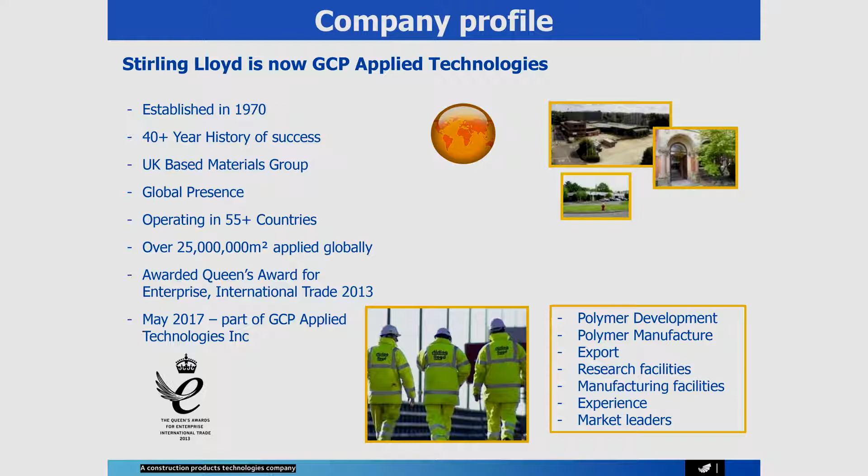The company Stirling Lloyd has more than 40 years experience in producing and developing waterproofing materials based on polymers, mainly methyl methacrylate. We have a global presence at the moment worldwide in more than 55 countries, where we achieved in the past 47 years application of more than 25 million square meters. From May 2017, we became part of GCP. We specialize in development of polymers, manufacturing, and making them available for everybody worldwide.

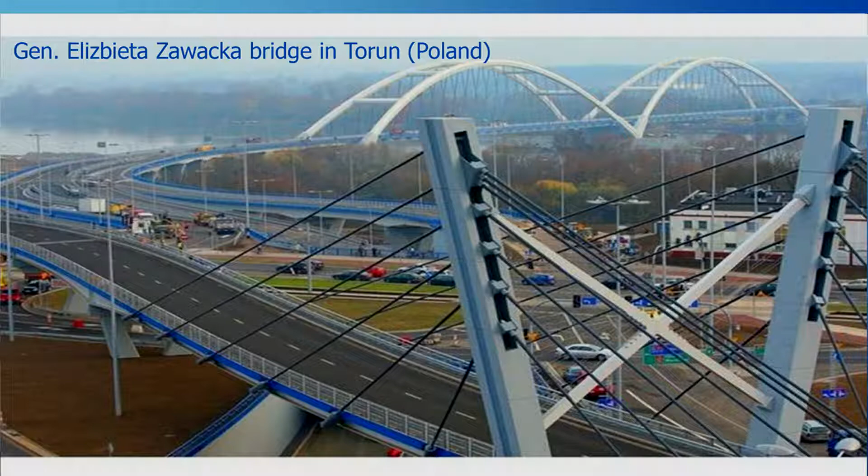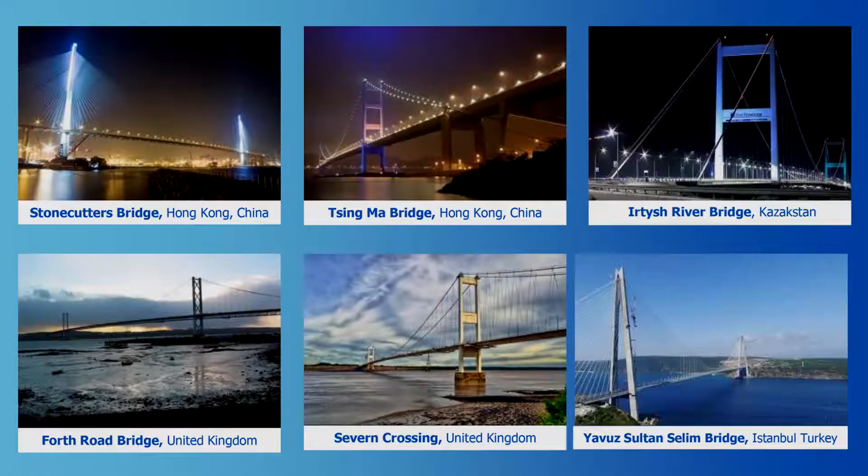A few successes of our application are Prague's Charles Bridge, Forth Road Bridge in the UK, the Hong Kong West Harbour Tunnel, which has been sunk to a depth in the sea of only 30 meters, the railway link in Boston, United States, Neponset River Bridge, Dubai, Durrat Al Bahrain, the viaduct, and Lincoln Tunnel in New York, as well as George Washington Bridge in New York City, Humen Bridge in China, where it was one of the first worldwide applications of our material together with Mastic Asphalt, also known as guss asphalt.

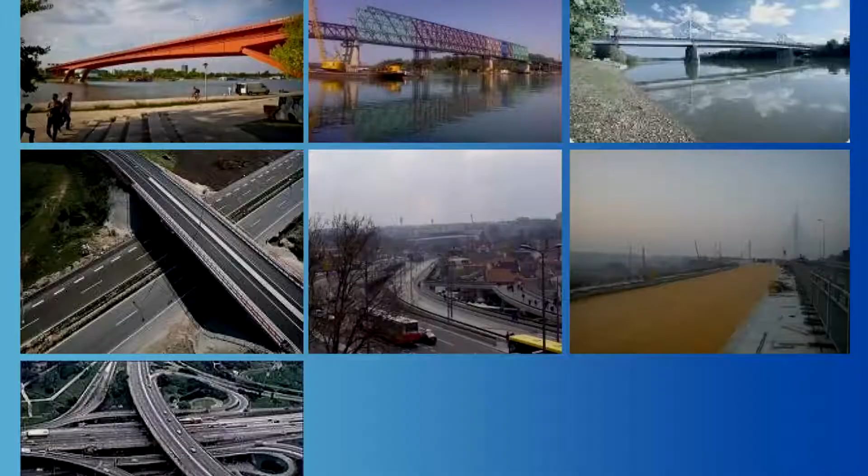This is the application of the immersed tube at the Formula One race track in Dubai, sorry, in Emirates. This is the Stonecutters Bridge in Hong Kong.

Pupin Bridge in Belgrade, Serbia, to show that we're not working only in the Far East, Middle East, or North America, but also have presence in Balkan territories.

Railway link in Russia, Sochi, 45 kilometers of steel and concrete bridges linking Krasnaya Polyana with Adler. Hong Kong railway link with the airport. Øresund Bridge, the railway link between Denmark and Sweden. Golden Horn Bay in Vladivostok, steel bridge deck covered with Mastic Asphalt for the APEC summit in 2012.

Poland, a very important European Union investment of more than 600 million euros to build a new bridge viaduct linking Torun with the highway Truss A1, and as well, closer to today's topic, the success of using our waterproofing material with Mastic Asphalt on iconic bridges: Stonecutters Bridge, Tsing Ma, Irtysh River Bridge, Forth Road Bridge, Severn, and Bosphorus 3.

It's not all the pictures, sorry. As well, a few references from Serbia and Montenegro, where we've done Gazela Bridge, Cerova Ćuprija, Obrenovac, a few bridges on the border between Bosnia and Herzegovina with Serbia. The most recent is Bratislava Bridge.

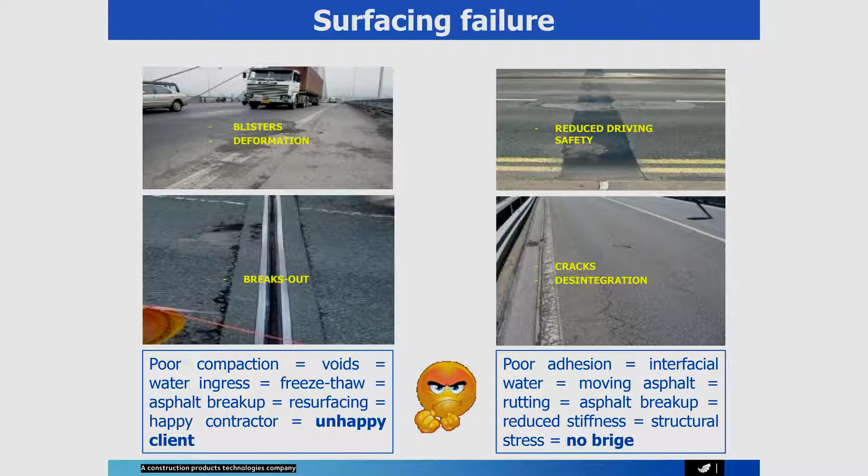And now, what exactly am I talking about? First of all, what is the problem now on structures like bridges and viaducts is mainly problems related to failure of surfacing. Those problems are related to poor compaction, voids, water ingress, poor adhesion, interfacial water between the layer of surfacing and waterproofing, and all that creates a lot of problems for the bridge constructor and the users of those bridges.

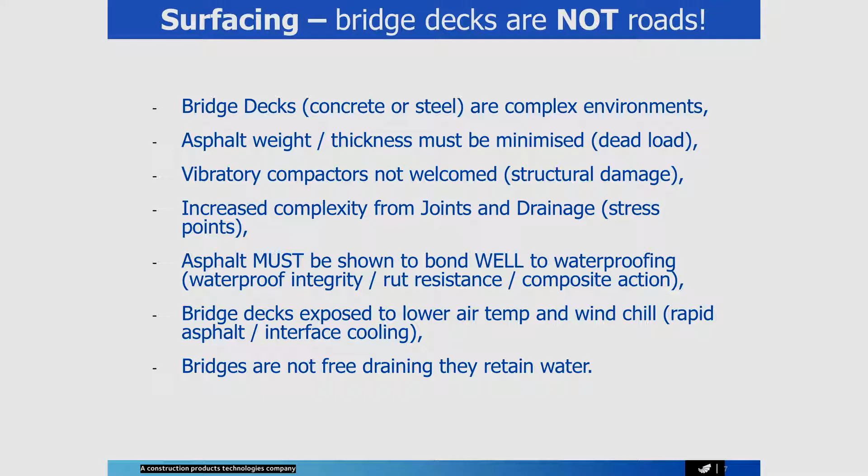We have to remember all the time that bridge decks are not roads, and the approach to maintenance and, first of all, construction and design of bridges should be absolutely different compared to roads. Because bridges are not free-draining structures, they retain water between the layers, and therefore we suggested to look more into the details of compaction, using the materials together and working together in the same way.

So we decided that bridges are structures for high stress usage, and therefore the surfacing should be specified for high stress sites, not just as for the roads.

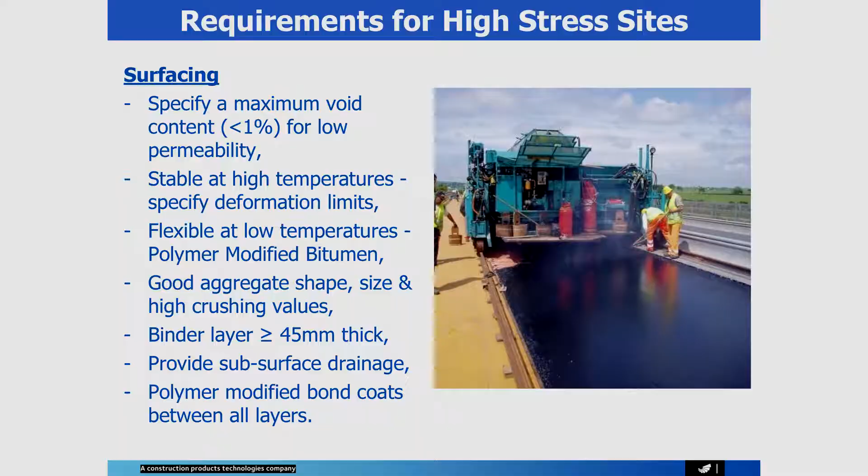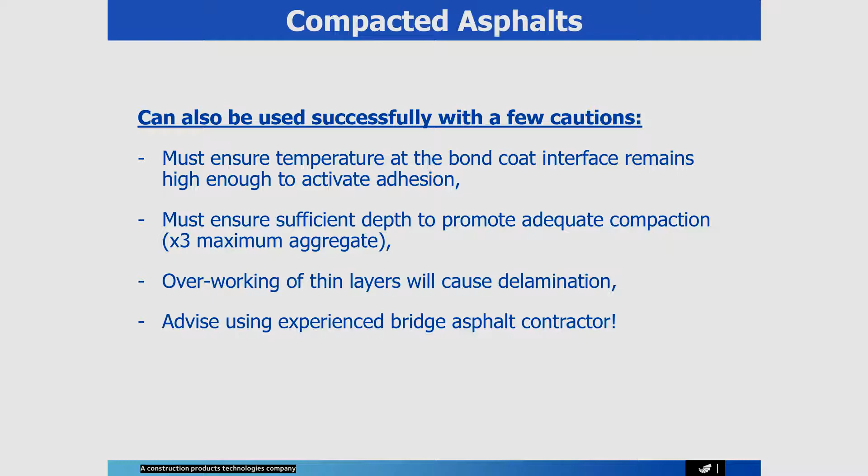So we started to look at what type of asphalt surfacing is used on bridges: compacted asphalts or non-compacted asphalts. Compacted asphalts could be used on bridges, but should be approached with massive caution, because the temperature of the bond coat interface should be high enough to activate the adhesion between waterproofing and surfacing, and there is a need to control the work of the asphalt applicators on the bridge.

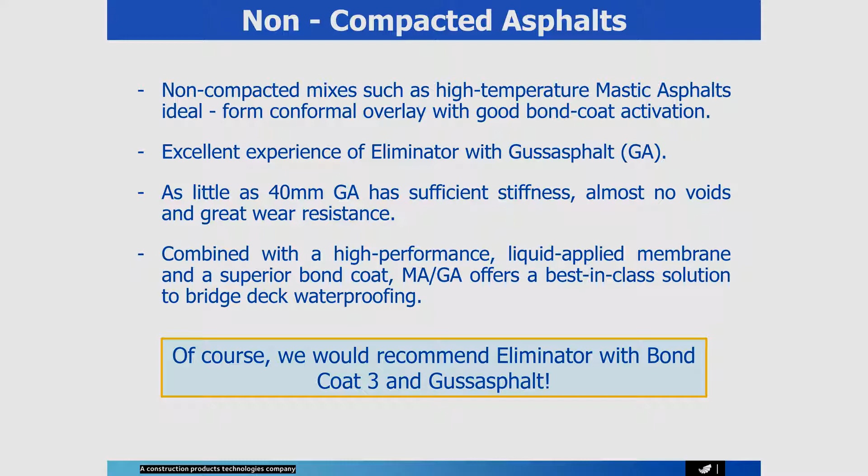At the same time, we started to look into the behavior and usage of non-compacted asphalt, or, easier to understand, mastic asphalt. In the past 40 years, we developed more than 12 million square meters worldwide using asphalt with our waterproofing system. And of course, we now recommend for everybody in the world to use our waterproofing with asphalt to avoid a lot of problems.

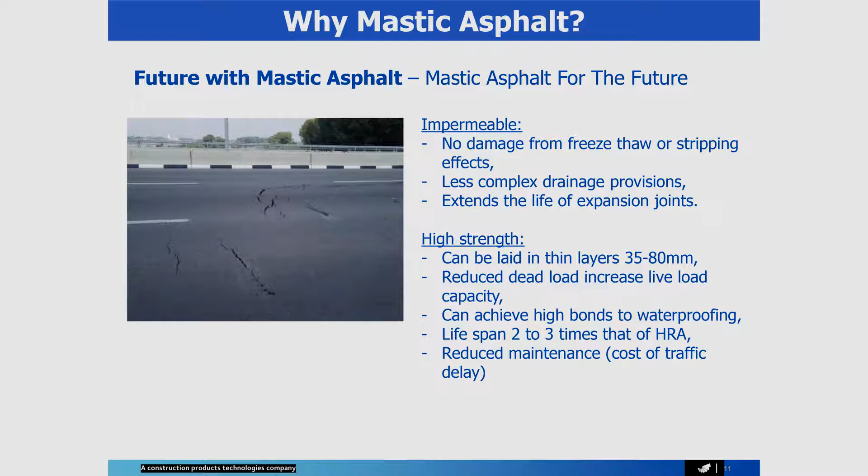Why mastic asphalt? First of all, if you're using compacted asphalt, then you can have problems with the liaison at the interface of the surfacing, and non-mastic asphalts do not represent impermeability. Mastic asphalts are impermeable and they have high strength.

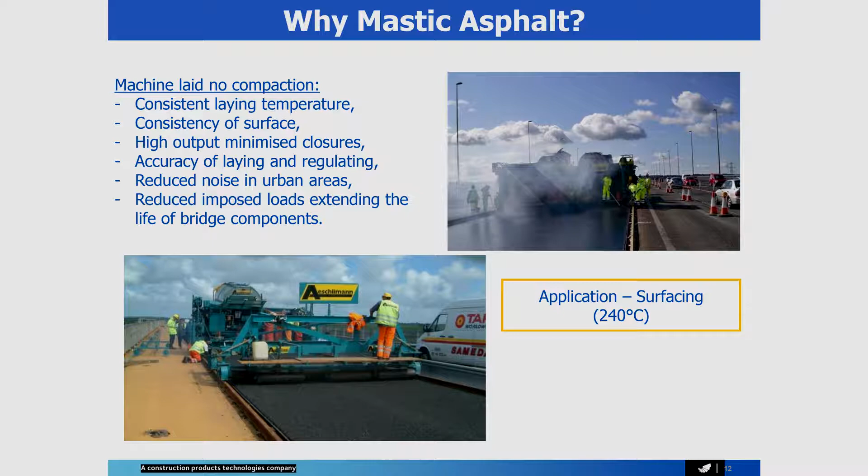In addition to the nature of mastic asphalt, it is machine laid. There is no compaction, no additional stress during application of the surfacing, and it is applied at very high temperature. So now we come to the position of looking at how it should be bonded with the waterproofing.

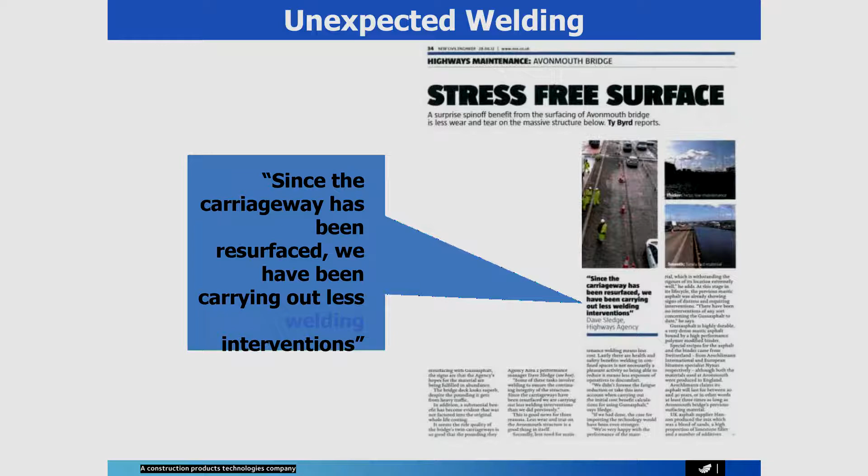Using our waterproofing system with asphalt in the UK, it was featured in UK professional trade magazines like Highways Maintenance, about the experience of applying our waterproofing material Eliminator together with asphalt from a Swiss company, Aschlimann. Users of the bridge noted that since they installed mastic asphalt, traffic stopping on site was much less, and practically none.

Before the application on that bridge, the company Flint & Neil, now COWI UK, together with Mott MacDonald and Aschlimann, carried out research called the whole life costing. They compared 5 different systems, including epoxy asphalt, bituminous waterproofing sheets, and mastic asphalt in combination with our material Eliminator.

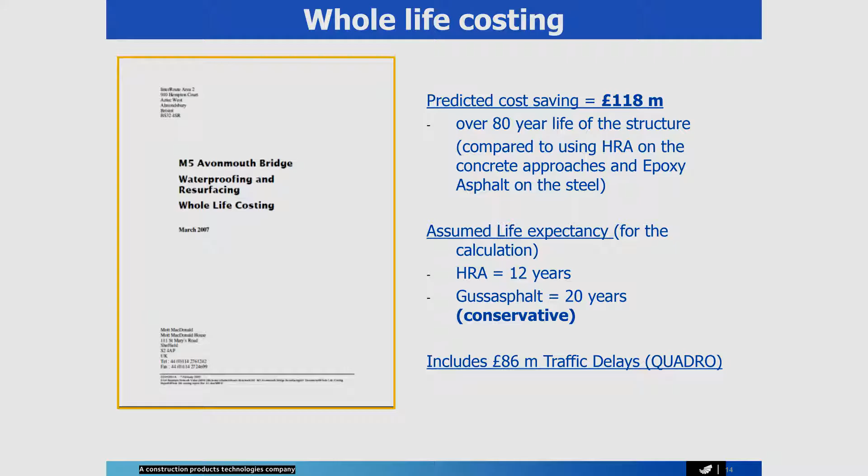At the end, everybody concluded that using our system together with mastic asphalt would give savings of more than £118 million over the 80-year life of the structure. These were conservative figures, assuming the first repair of the wearing course of asphalt would happen only 20 years after the first installation.

That would give £86 million in savings on traffic delays. So the traffic delays would be avoided.

So, major points about asphalt: it's a thin surfacing, minimum 40 millimeters, 4 centimeters, which would be enough on a bridge in combination with a liquid applied MMA waterproofing system. It's flexible at low temperatures, and it's applied by the finisher, so fewer joints.

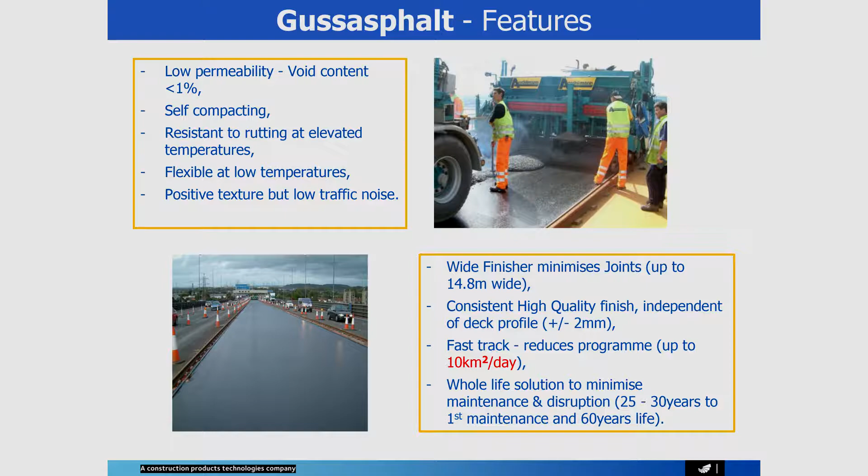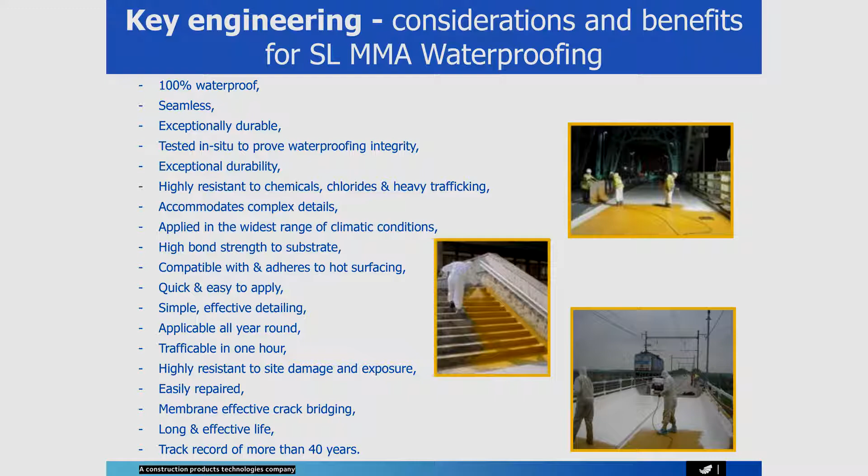Then we come to how to liaise this surfacing with the waterproofing. Our company developed this based on the methyl methacrylate waterproofing system Eliminator, which provides all the listed considerations and benefits based on investigations and failures of previously traditionally used waterproofing systems. It is quick and easy to apply, 100% waterproof, bonds very well with the substrate, and provides a good bond with the asphalt, extending the life of the surfacing for many more years than traditional waterproofing systems.

Eliminator is a very simple system, made of methyl methacrylate, as I said. It's fully certified under European Union legislation and has a European Technical Assessment under ETAG 033 for liquid waterproofing systems.

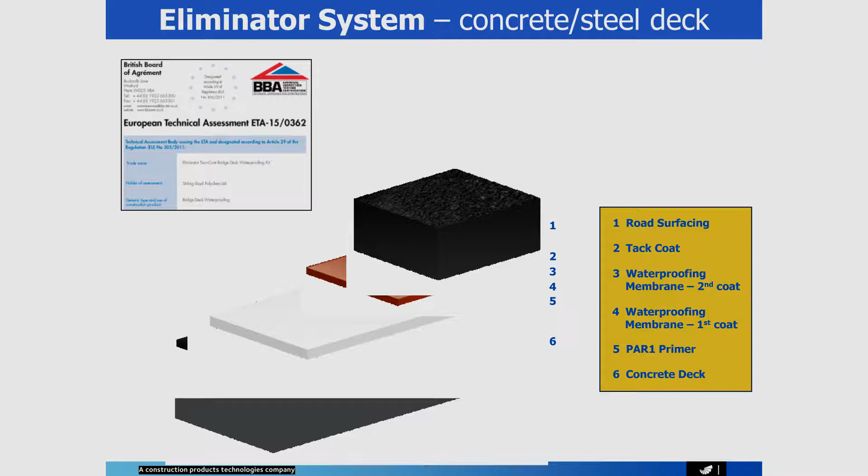Before certification, it was tested for adhesion with all types of surfacing, and now we have the bond coat, which allows us to work with all types of surfacing, like asphalt concrete, stone mastic asphalt, and of course, guss asphalt. The system consists of several layers.

There's a primer for the concrete substrate and a primer for steel substrate. For concrete, we apply the system in 2 layers, yellow and white. If it's steel, it's just 1 layer. Then a bond coat, followed by application of the surfacing directly onto the waterproofing system.

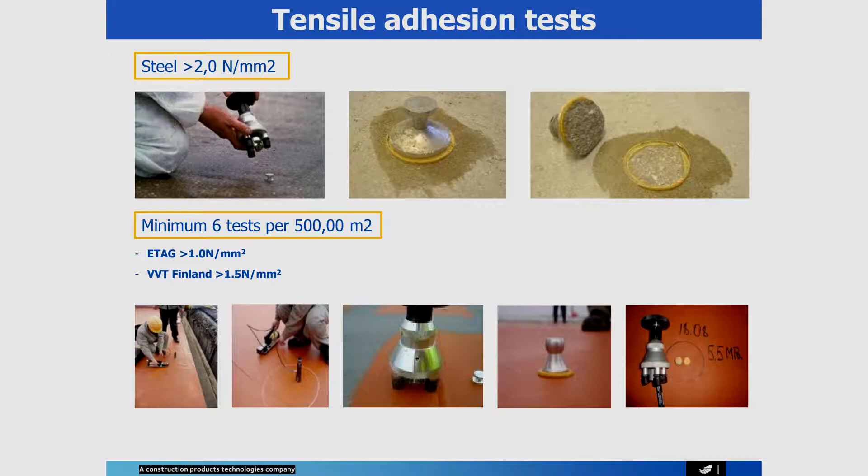Prior to application, we check the adhesion, so we know exactly what the adhesion of the system will be, not only immediately after application but for the long term, because we record everything, including the temperature, the area, the time of application, and when the material was produced. This is retained for at least 5 years in our company.

As a result of the check and test, we know we achieve adhesion of the waterproofing to the substrate of at least 1 megapascal for concrete, or at least 2 megapascals for steel. However, in reality, the results are much higher: on concrete more than 2 megapascals, and on steel sometimes up to 7 or 8 megapascals, and that's not even the full result of the test, just because the equipment doesn't allow us to check to the full extent.

The system can be applied in different weather conditions. We applied it in sub-zero conditions in Sweden, in New York, in Poland, in Ukraine, in Serbia. We also applied it in very hot weather conditions, for example in Bahrain, when it was plus 40 degrees, and in Qatar, where it is constantly hot, especially in summer.

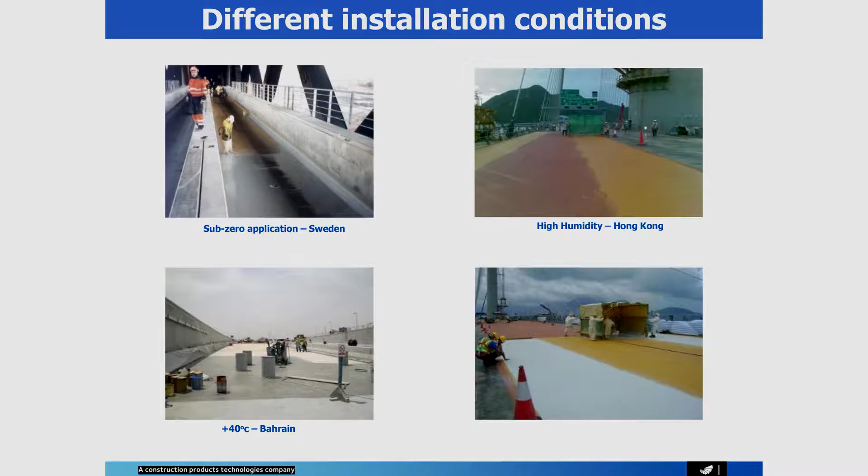High humidity examples: Hong Kong is a very good example, as well as Vladivostok in Russia, and Kyiv, Ukraine, just over the river Dnipro. We also have the ability, during application of our system, to phase the works, so you can plan ahead how quickly you can do that and achieve very good and serious savings of money during the full construction, either refurbishment or new construction.

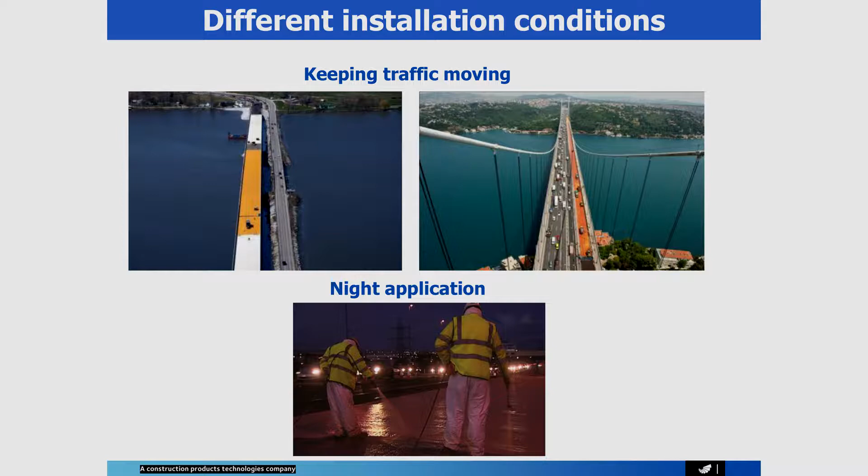As you can see, on the application on the Bosporus 2, one lane was applied with the system, and then three lanes were used, so we allowed traffic to continue non-stop with no delays on using the bridge. Given the engineering solution of the colors, this gives us the chance to do the application not only during the day, but also during the night and in winter, as I said already.

Because it is a liquid applied system, it cures very quickly, with curing time up to 45 minutes maximum. It's liquid and cold applied, so it's not needed to be heated, it's applied in cold condition, and it works very well for the very serious and very difficult detailings.

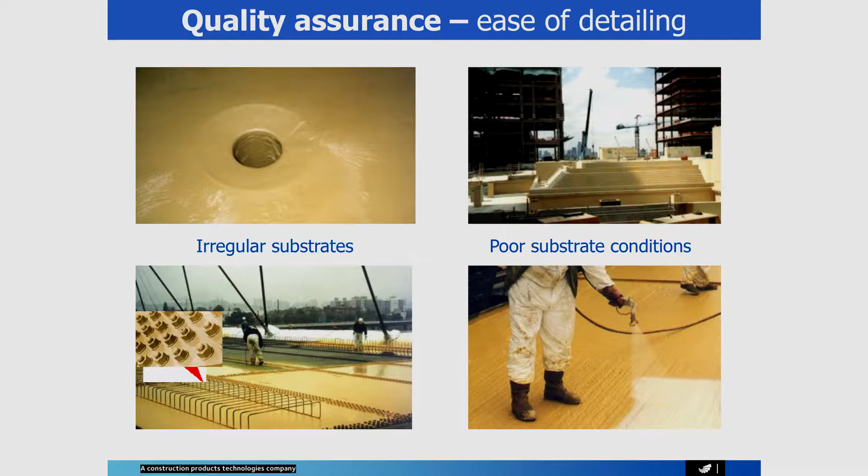Like you see in the pictures on the stairs, that's London, the area of Canary Wharf, which was done in just one day. The speed of application could be as well up to 3,000 square meters per day if everything is organized properly. We can work on vertical surfaces, and because it's a thixotropic material, it can be applied on a very irregular substrate, so the finish of the substrate is not a major issue for us.

The most important thing is to have a dry surface. During the application, we control not only the bond but also the thickness, because we are thinking about your money, the money of the client, of the main contractors who want to save it. So we don't want you to overuse our system, but to use the right minimum needed for full cover.

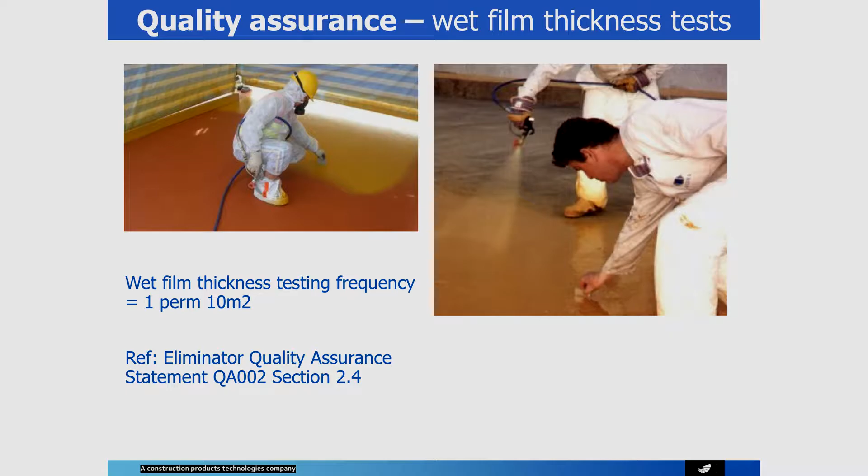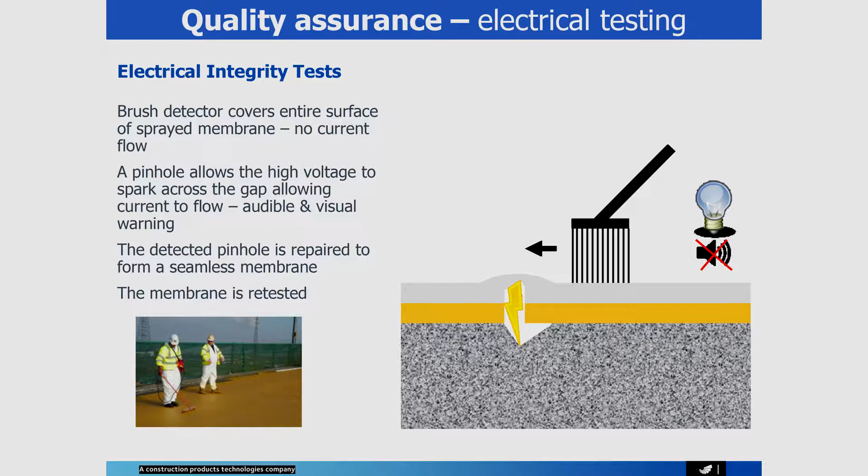During the application, especially on concrete surfaces, we organize a so-called holiday test. The holiday test is organized by an electric brush under 12 kilovolts, which is passed on the surface of the applied system. If an invisible pinhole is detected, we hear a sound, a sparkle, and we immediately mark that area, repairing it immediately on site.

This material has the unique capability of quick and easy repair immediately, and then we provide, after the repairing, another test, and we see that it is fully integrally waterproofed. Compared with other liquid applied waterproofing systems, we provide full integrity covering all the pinholes.

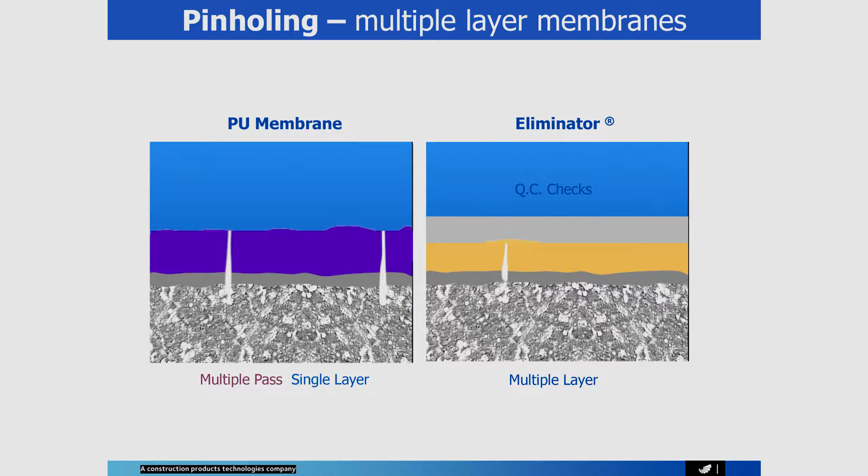Polyurethane, epoxy, and polyurea systems also create thermal shock to the concrete substrate as the concrete breathes, and then it is impossible to do the overcoating or overlay in a very short or even longer period of time, so we cannot guarantee 100% integrity with those.

Using the MMA system, we have the opportunity to repair the pinholes and provide full waterproofing of the bridge structure as well, with quality control on site.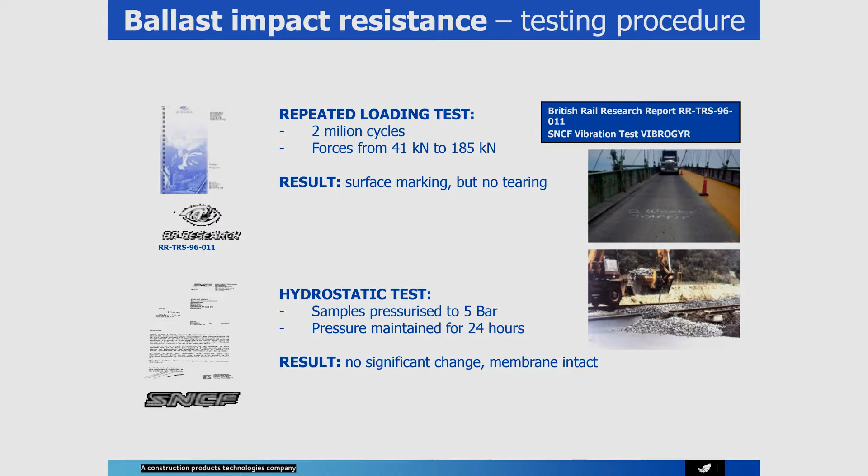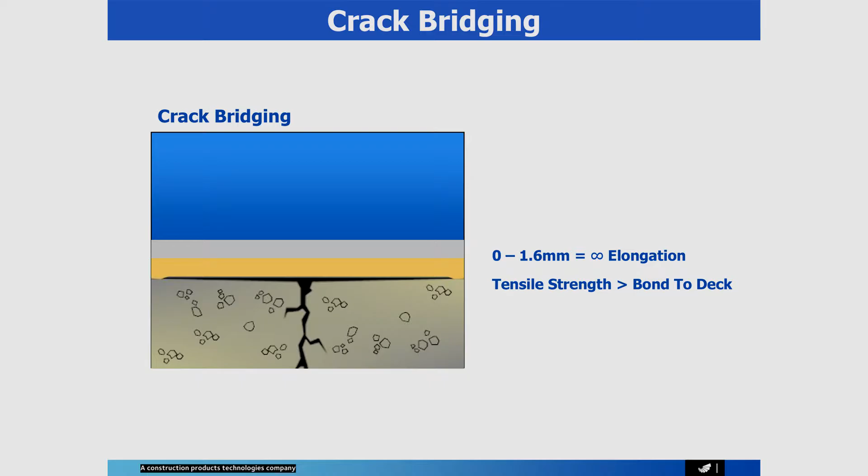One of the most important features of our system is the crack bridging capability. The maximum elongation of the system is 130%, and the tensile strength of the system is greater than the bond to the deck. You can see an unfortunate example from the French rails.

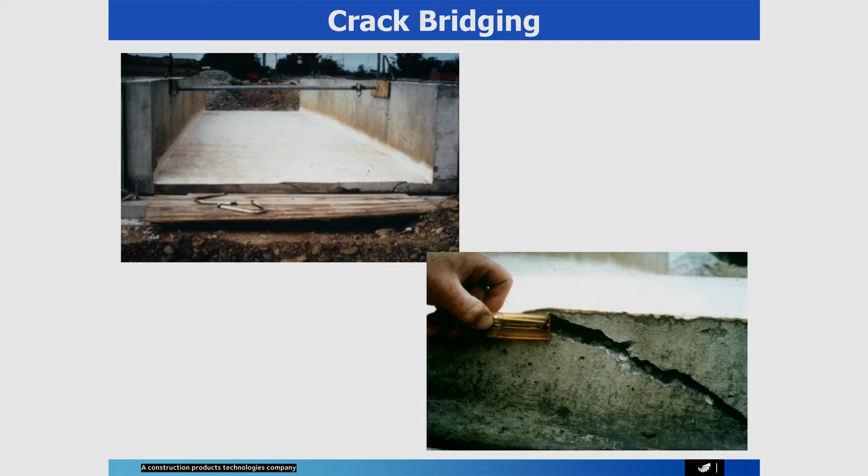The ballast bridge was prepared not on site, but outside, covered with one layer of eliminator, and then transported. During installation, the cables broke and the bridge fell 15 meters down to the ground. You can see two longitudinal cracks, but the system was intact. For us, it was a fantastic opportunity to have advertising for free.

At the end of my presentation, I would like to use a quotation from Benjamin Franklin, well known as one of the leaders of the United States during the Independence War: that the bitterness of poor quality remains long after the sweetness of low price is forgotten.

I'm not saying that we are the most expensive in the world. We are not cheap, but we provide very high quality, and that will stay always with people who are using our material in more than 56 countries worldwide, using our experience.